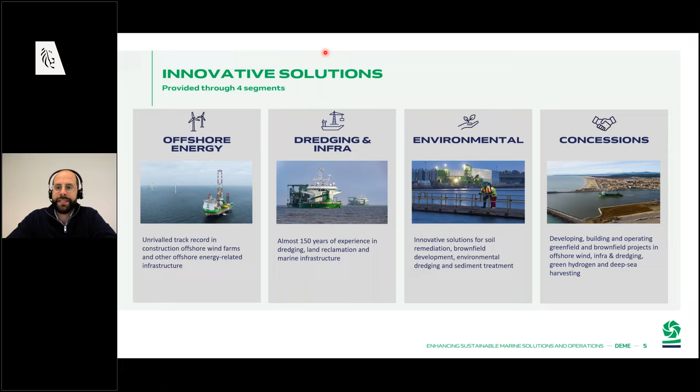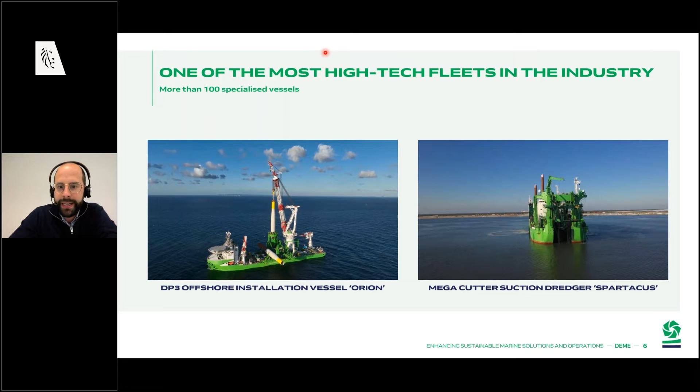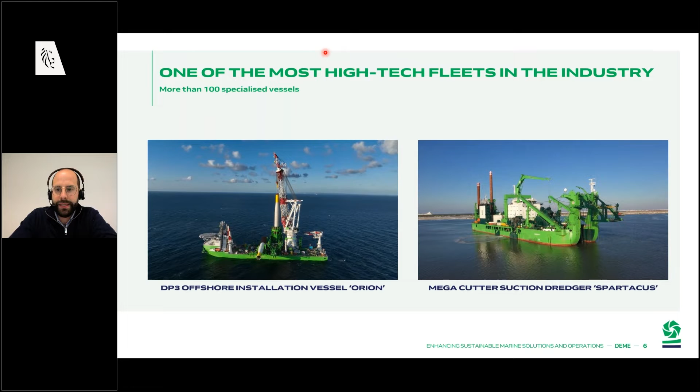How do we do this? We do this with our impressive fleet. We have more than 100 specialized vessels, and the 2 most impressive ones are shown here. On the left, you see an offshore installation vessel, the Orion. So foundations are installed from a floating vessel which is feeling waves and current, and we install foundations and wind turbines. And on the right, you see a mega cutter suction dredger. So we cut away soil to deepen the sea near port infrastructure, for example.

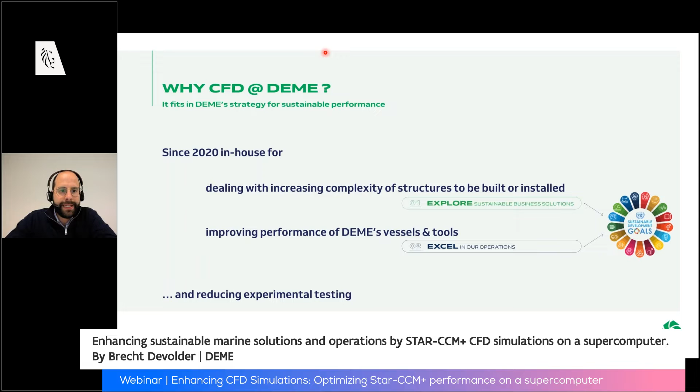So why would a marine contractor actually do CFD simulations? So it fits in DEME's strategy for sustainable performance. So we do CFD since 2020 for 2 main reasons. Over the past years, we have seen that the complexity of structures that we have to build or install is increasing a lot. And by using CFD, we are able to explore sustainable business solutions. A second reason is also to improve the performance of our vessels and tools. So we really excel in our operations. If one of our vessels can work in a higher sea state, we can do more projects over multiple years. And those two reasons, they help us in reaching our sustainable development goals.

And those two reasons also reduce the need for experimental testing. So in the past, there was a strong tendency in the marine sector to build small-scale models and test them in a physical water basin. But since recent years, the computers became faster and stronger. HPC centers were there, and that allows us, apart from doing physical testing, to also run digital experiments. And I'm not saying that we fully want to replace experimental testing by computer simulations. They go more hand in hand, and I will show it later in one of the examples I will present to you.

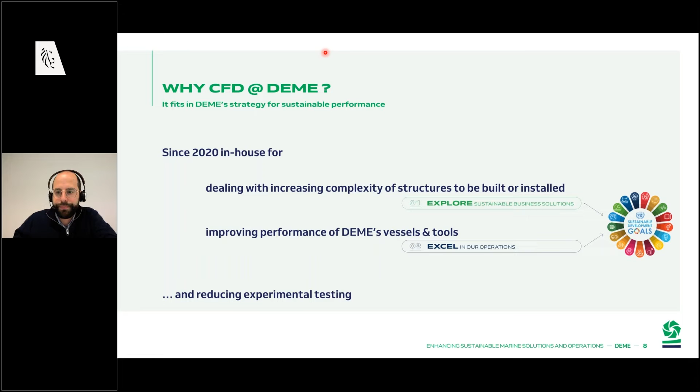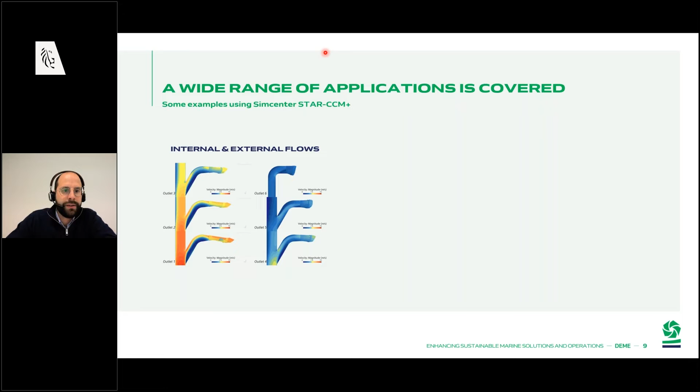Within DEME, we cover a wide range of applications, and on this slide I will present some examples using Simcenter STAR-CCM+. First, we do internal and external flows. So the example you see here is a very long pipe system with different exit nozzles. And this piping system can be used to fill a concrete element with sand to sink on the seabed, or to spray sand under a special tunnel element. And the reason why we do these simulations is to design the nozzle diameters so we can have an equal outflow of water or sand or whatsoever coming out of each nozzle over the length of the full piping system.

Another application is multi-phase simulations, where we have one of our vessels in a digital water tank, and we are able to calculate the hydrodynamic resistance of such a vessel, because the hydrodynamic resistance is directly linked to the fuel consumption. So if you can optimize the shape of your vessel, you will reduce the energy consumption, which is very important in our business. I mean, our vessels, they are not shipping vessels which transport cargo from A to B. They are really working vessels, not always the most pretty shape. So if you can improve their shape and reduce the fuel consumption, that's really a plus plus.

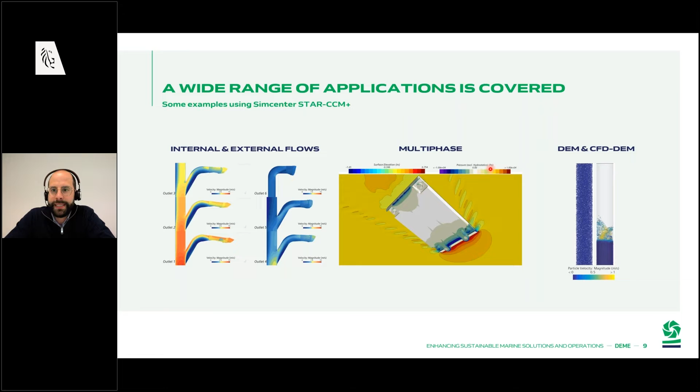And then a last application I can present is discrete element modeling, or the coupling between CFD and discrete element modeling. So it's a small experiment that we did to verify the settling behavior of particles underwater. So we have a column filled with water, but also full of small particles. That's the initial condition. We run the simulation to see how fast these particles are settling towards the right picture on this slide.

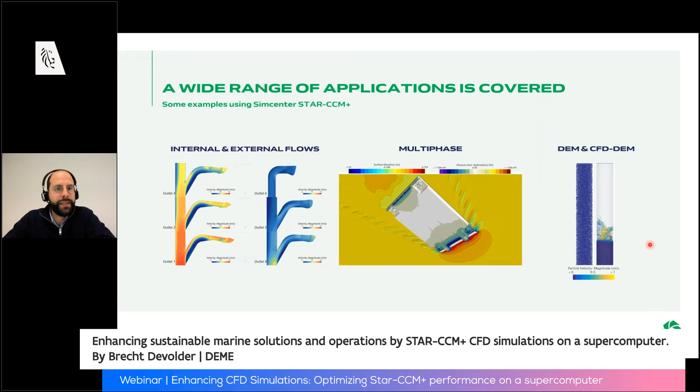Yeah, that's also the reason why we are choosing STAR-CCM+, because it's a multi-physics code. So it enables us to do a wide range of applications, which is not always that convenient in other alternative codes.

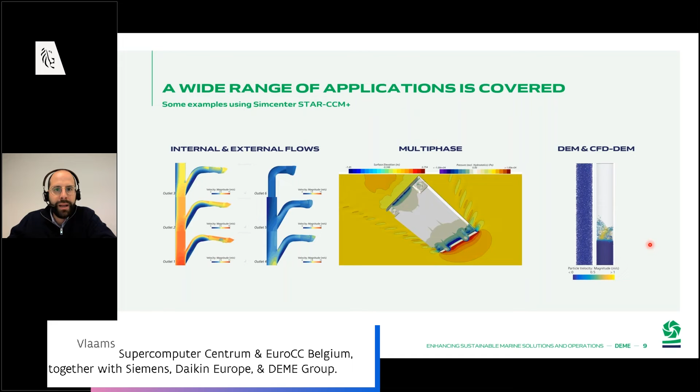The hardware we are using for our CFD simulations is almost fully provided by the Flemish Supercomputer Center. We have seen this picture before in the presentation of Liam, if I remember correctly. So here you see the different options that the Flemish supercomputer is offering. And the main things that we are using are the web portal, so the Open OnDemand application, the main partition with the CPU nodes, and the interactive and debug partition.

At this moment, we're not using any GPUs for solving simulations. One of the reasons is that, okay, it comes with a cost, but also that we do a wide range of applications, and not all physics are yet supported on GPUs.

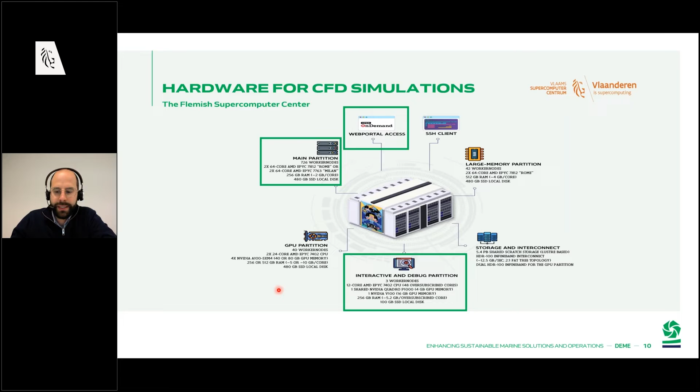So how do we use the Flemish supercomputer for our simulations? Well, it comes later, because it's part of our acceleration program of STAR-CCM+ simulations on HPC. Sorry.

So the first step in our acceleration program is pre-processing. Most HPC users use HPC computing for solving the equations. But we are also using the Flemish supercomputer to do pre-processing. And there are actually three reasons for this.

The first reason is that we often deal with very complex geometries, as you can see here on this slide. So this geometry file is a STEP file. It's much bigger than 1 gigabyte. It's about 7 to 8 gigabytes. It's very heavy because it contains every single detail in this model. So every bolt and screw is included in that geometry file. And of course, that's not directly suitable for meshing operations. So we do interactive editing in 3D CAD within STAR-CCM+.

The second reason is you cannot do everything manually in 3D CAD. So we also perform surface wrapping to make the volume or the geometry file watertight. And for that, we need high CPU speed and RAM memory, which is also offered on the Flemish supercomputer. And then the third reason is for the volume meshing. Within STAR-CCM+, we can use MPI to do parallel volume meshing. So we can run it within a single node on 128 CPUs, or even multi-node meshing is possible.

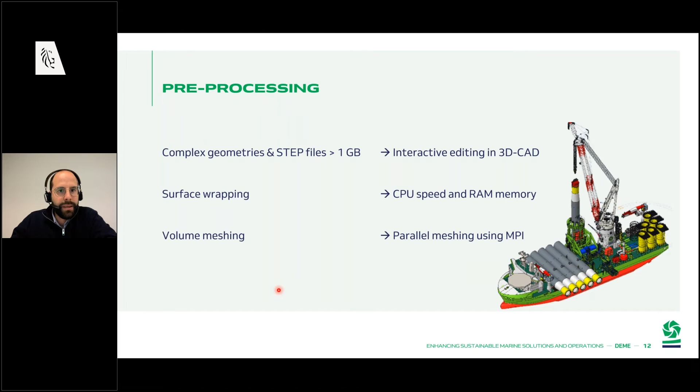So for this pre-processing, we rely on the Open OnDemand service provided by the supercomputer. I think Monica gave a great introduction on the Open OnDemand portal. I will just add a few more things. So here you see one of the interactive desktops that we're launching from the OnDemand server. And how we do it is we make use of the client-server render interface that STAR-CCM+ is offering. So it's really a combination of using the right hardware with the right software.

And the strength of STAR-CCM+ is that your user interface can run on a different compute instance than the server. And with the server, I mean the computer that is actually solving the equations. So to run the client, we make use of the debug node. And on that debug node, there is also a GPU available. So the client and the render are within the same debug node, and then the server is launched on a different compute node on the Rome or Milan partition.

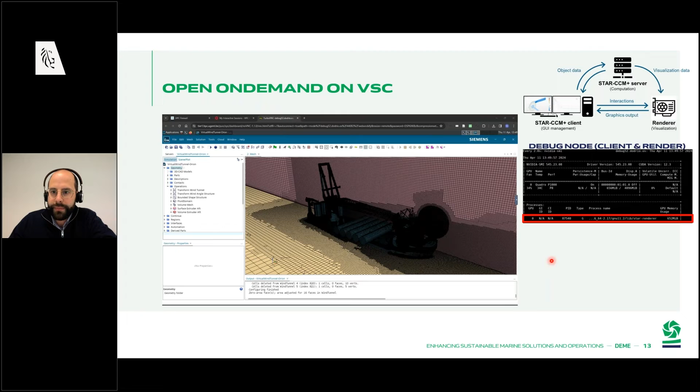And you can see it here. If you run the nvidia-smi command on the debug node, you see that the render service is really using the NVIDIA GPU. And if you log in on the compute node, then you see that STAR-CCM+ is launched on the Milan or Rome partition. And with this interactive way of working, we use the strength of the debug node for the graphic performance, and we use the strength of the compute node to do the processing, like removing details, wrapping the surface, and making the volume mesh.

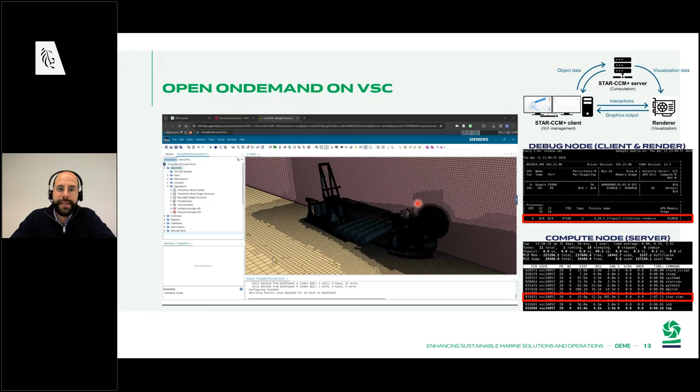Now I will focus a bit more on the project that we are solving within Simcenter STAR-CCM+. And the first application is in our virtual water tank, where we simulate the motion of an offshore installation vessel. So we have a big domain of water where we put our vessel in, and we are studying the roll motion. And why the roll motion? Because it's very important for the stability of our vessels during operations.

You have to imagine that this vessel remains floating. It's not a jack-up, so it's not lifted out of the water during the operations. It's still floating, so it feels the waves, and because of the waves, your vessel will start to move. And to have safe operations, it's very important to limit these motions, and roll damping is really important to limit these motions. So it's really a requirement to understand the roll damping in detail.

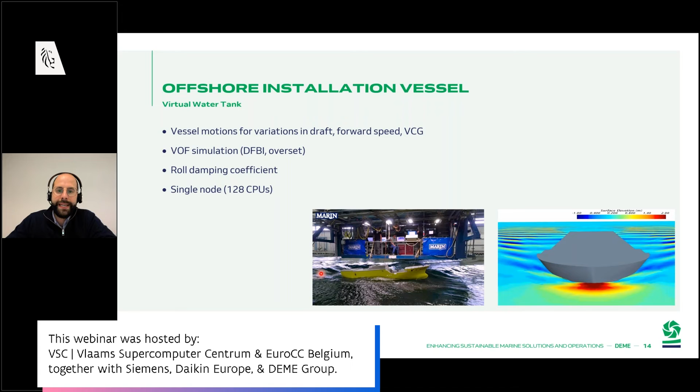And once we have validated and calibrated the CFD model, we can start exploring a wide range of variations in draft, forward speed, and different positions of the vertical center of gravity. And that will give us a whole database of roll damping coefficients for these different loading conditions. And that database is then used in follow-up studies to really calculate the motion of a vessel in a specific sea state.

This virtual water tank is using the volume of fluid technique. So we are resolving the free surface, water below, air on top, and in between you have the water interface. And we also use the DFBI motion. So the body is allowed to move in a few degrees of freedom. And we also use overset. So we make a mesh very close to the vessel. It was a polyhedral mesh, and then we have a background mesh which remains fixed and resembles our virtual water tank.

All these simulations were run on a single node, so 128 CPUs, and the reason is they don't scale that well for a higher core count because the number of cells was limited. And the reason behind that is that the simulations are transient, so unsteady, and the time step is based on the maximum CFL number. So if you make your cells smaller, you have the option to use more cores and to have more accurate solutions, but that also implies that your time step will reduce because you have a fixed CFL number that you have to satisfy.

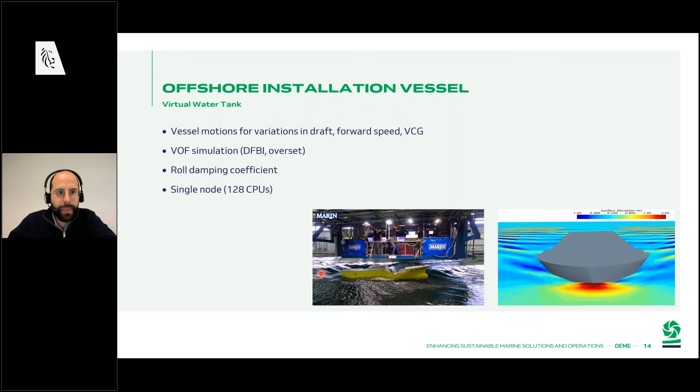Another example that I want to show to you is still in our virtual water tank, where we are simulating an offshore monopile installation tool. This was for a project in France where we had to install foundations from a jack-up vessel. So it's not a vessel which remains floating during the installation. The vessel can lift itself up out of the water with four of these steel legs. So the vessel is not feeling the waves anymore.

And what was the challenge here? In the Atlantic Ocean near France, the seabed is made from rock at some locations. And at that location, we had to install foundations. And usually in a sandy seabed, we hammer these piles in the sand, but you cannot do this in rock. The rock is just too strong. So how did we do it? We used a drilling technique. So we made a hole in the rocky seabed.

We put that pile in that opening, the drilled opening. There was some small space between the borehole and the pile. We had to fill this with some kind of grout paste, which is a fluid in the beginning and it hardens over time. And during that hardening process, it was very important that that pile foundation is not moving. And that pile foundation is actually exposed to waves.

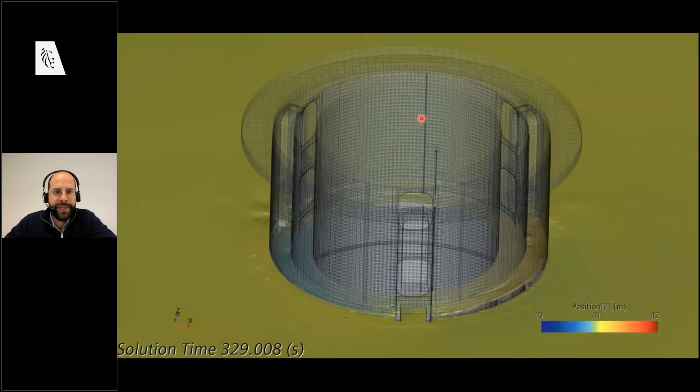So how is it looking? Here you see the position of the free surface. The outer shell is shaking from left to right, and in the middle, so within this protection cylinder, you see the monopile foundation, which is fixed. And the output of the CFD simulation is to calculate the forces on that pile foundation to check the stability.

And again, we run these simulations on a single node for the same reason, that these simulations are unsteady, and the time step depends on the mesh dimensions. So a very fine mesh requires a very small time step, and these simulations, they scale but not perfectly. So that's again a motivation to use a single node for a specific cell count.

And the good thing about the Flemish supercomputer is that they not only have a lot of CPUs, but also the quality of a single CPU is very good. So if you stay within a single node, you can use the latest generation of CPUs to have your results within a feasible time window, which is something like a few hours, maximum 2 days.

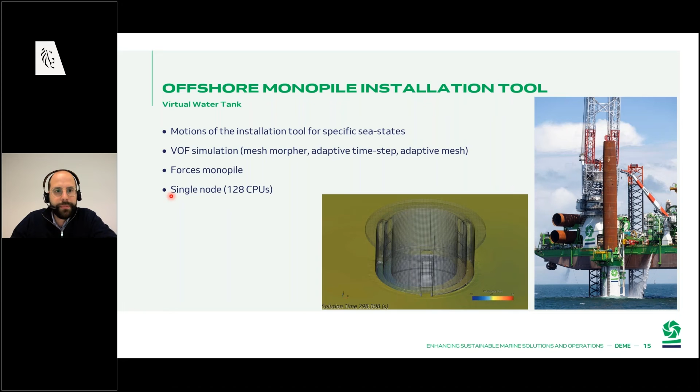Then the last application I want to present to you is another offshore installation vessel, but this time in our virtual wind tunnel. And with this simulation, we want to understand the forces on the installation vessel. Because during an offshore operation, we have to make sure that the vessel remains in position. And how is it done? On that vessel, there are 6 or 8 thrusters which maintain the position of the vessel during the operation.

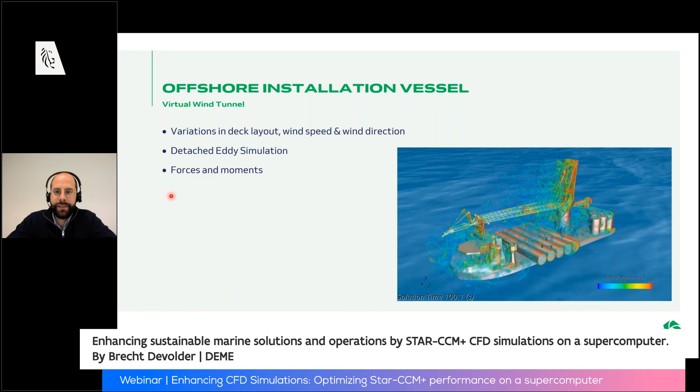It's called dynamic positioning. To design that dynamic positioning algorithm, the wind force is an input value. And if you know that wind force very accurately, you can design your DP system quite well, and you are allowed to work in higher sea states or higher wind conditions, because you can estimate the wind forces much more accurately, and you need to introduce less conservatism in the design.

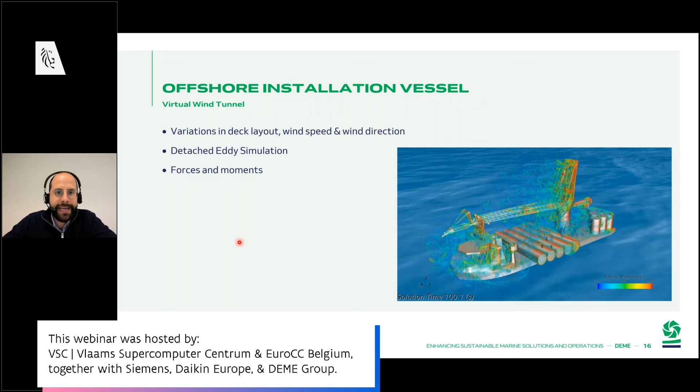So within this digital wind tunnel, we are free to put any geometry we want. So we can have variations in deck layout. We can easily change the wind speed and the wind direction.

For this simulation, we have chosen to use detached eddy simulation, which is a combination of Reynolds-averaged Navier-Stokes simulations and LES simulations. So RANS is used in the far field, where we are not interested in the turbulent fluctuations. And LES is used in the regions where we have enough mesh resolution, where the time step is small enough, and then we can really simulate the turbulent fluctuations over time.

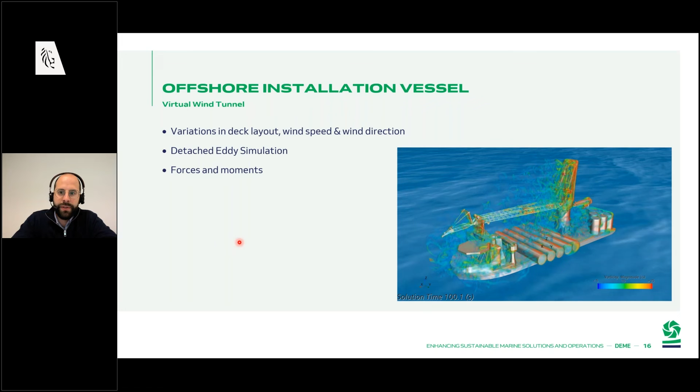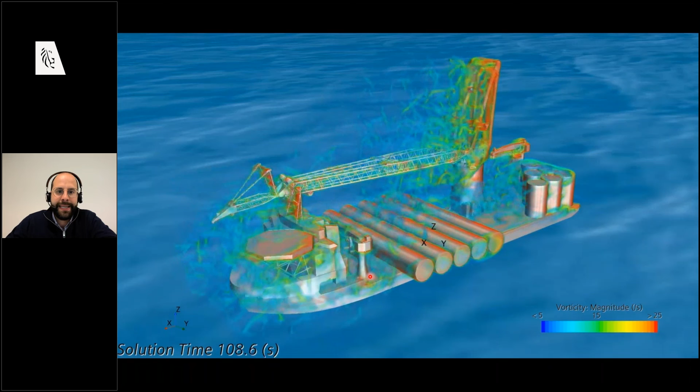And the output of such a simulation is the forces and moments on the vessel. But we can also see some interesting flow features, like we see that the crane is creating quite some turbulence. And with this simulation, we can also check or verify safe helicopter landings on the helicopter platform, because we are far offshore. Crew needs to be changed, and one way that can be used is to use a helicopter, and we want to have safe operations for our crew, so we have to limit the turbulence on top of the helideck, or to verify that turbulence is limited above a helideck.

And one way is to perform these very intense DES simulations, which is a combination of RANS and high fidelity LES in the regions where we have interest. And this simulation actually scales very well on the Flemish supercomputer. So we were not restricted to a single node. I did some checks the past weeks to see how good it scales.

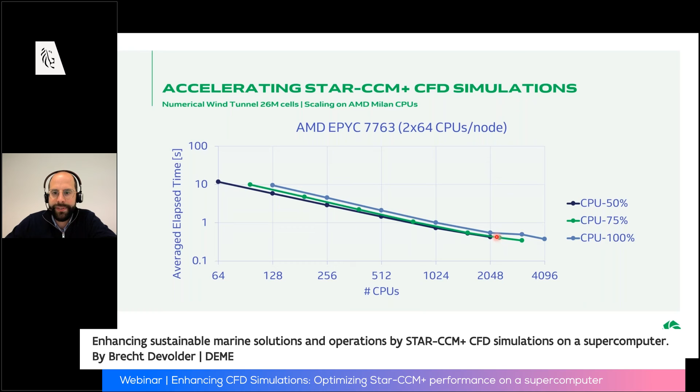What else do we see is that the more CPUs you use, the faster your simulation runs. Up to 2048 CPUs, which is, I think it was 16 nodes that we were using. And then we saw a deviation from the 100% efficiency line. So by using the Flemish supercomputer, we reduced the simulation time of a single simulation, which would take weeks on a desktop, towards 3 or 4 hours on 16 nodes. So that enables us to do different wind directions, different wind speeds, and different deck layouts of the one specific vessel.

And I think the reason behind that is, I double checked this with a support engineer from Siemens, that the L3 cache within the AMD Milan CPUs is quite high. And if you use more CPUs, you're almost putting your whole problem into the L3 cache of your CPU, which is the fastest memory you have available within that CPU.

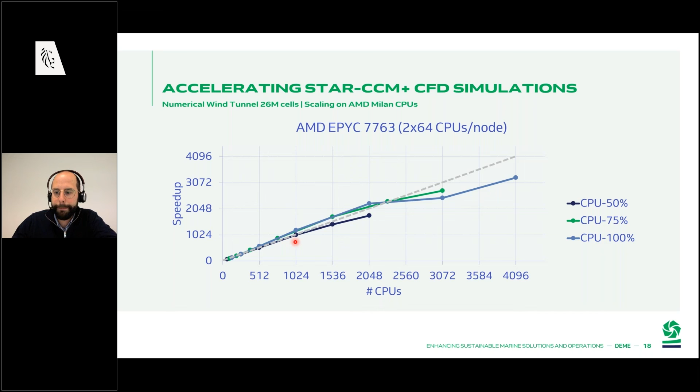So to conclude this presentation, some takeaway messages, how we enhance our sustainable marine solutions and operations by STAR-CCM+ CFD simulations on the Flemish supercomputer. So we really need the HPC to make our simulations feasible, to have results in a short time window, not only for solving, but also the pre and post processing, which we do on the Flemish supercomputer by using the debug node and the available GPU on the debug node. It's also important to keep your data close to the computing power, so that you're not losing any time by transferring simulation files from external HPC providers towards your corporate network.

A third point is that not all applications scale in a similar way. Like if we have unsteady flows, which require a maximum CFL number, the scaling is not as good as a numerical wind tunnel with RANS or DES, where you can scale up to 2000 CPU cores.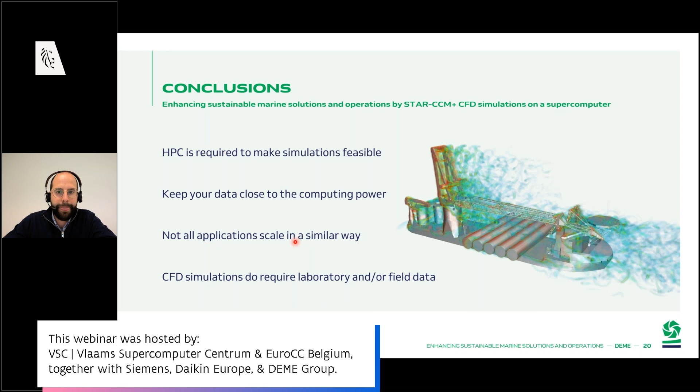And last thing, very important, is that CFD simulations still require laboratory or field data for validation and calibration. So what I believe is that CFD simulations will never replace field tests, but they will make us smarter in how to prepare these field tests. It's really the combination of digital techniques with physical techniques. And your digital techniques, you can accelerate them by using HPC, for example, the HPC provided by the Flemish supercomputer.